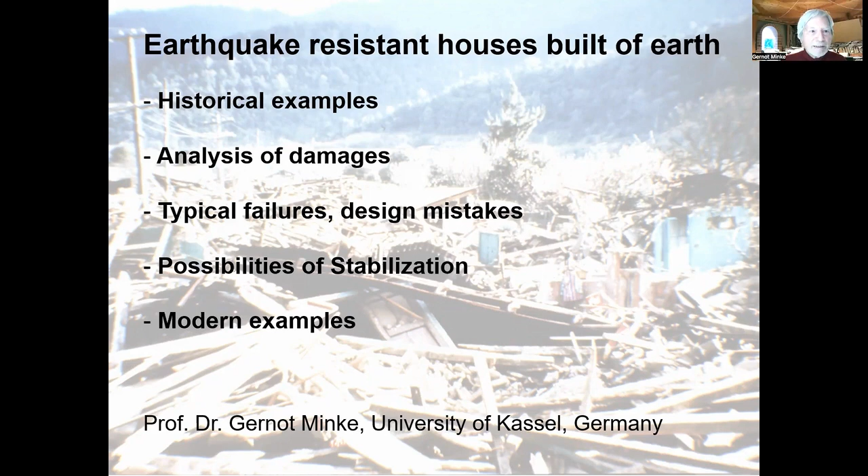We have two possibilities to build earthquake resistant, either with solid, thick walls like these structures they built 300 years ago in China, which withstood all the earthquakes, or flexible structures like this wattle and daub system, which I will explain later, which is flexible. It could move in the earthquake, but it did not collapse. It was from Guatemala during an earthquake.

Very important is the shape of the house itself. So we made some tests in our laboratory with a doctoral student. This is a heavy weight on a pendulum which shocks against this model of a house with a round ground plan, a round shape. And after 3 shocks, this model didn't show any cracks in the wall.

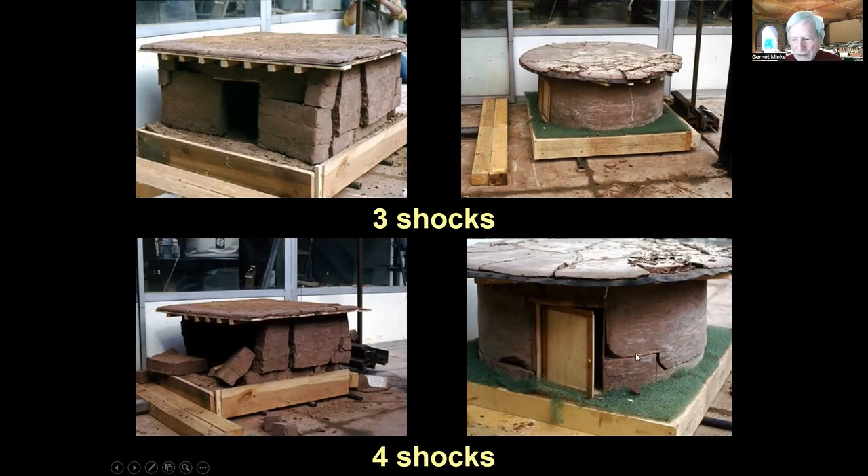But the other one, which was square, showed heavy cracks. And after 4 shocks, it fell down. But the round shape only had 1 short crack here, but it still withstood. Oh, sorry, this turned round. I don't know why. Let's go on. Okay, I can't move it.

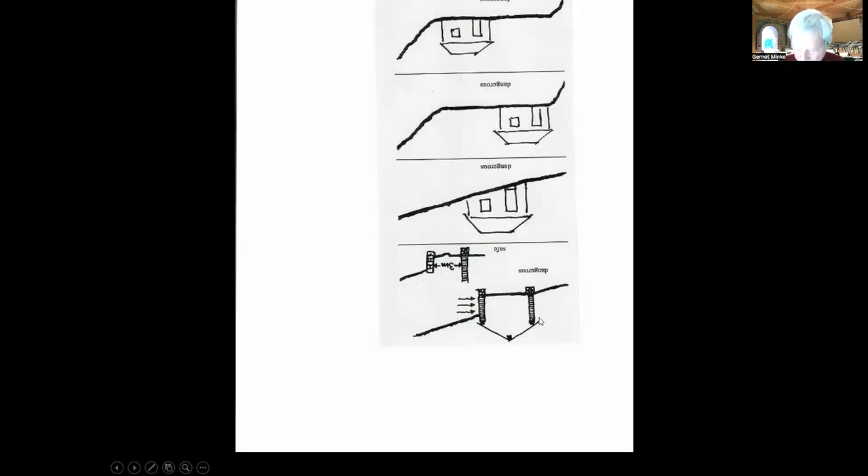The position on a hill is very important. Maybe you can see overhead. If it is on an inclined surface, it's very dangerous. So it should be flattened and it shouldn't be at the corner. Maybe in my publication you have seen this more clearly.

In a research project we did in Latin America, in the Andes, where we have a lot of heavy earthquakes every so often, we defined the errors which were made by single houses, 1-story houses. Always the same errors were made. First of all, there is no ring beam on the top of the wall, which keeps together the wall. Then the second one, the lintels are a problem. The lintels don't penetrate enough into the wall. 40 to 50 centimeters should be okay, but normally it's very little. So this will lead to failure.

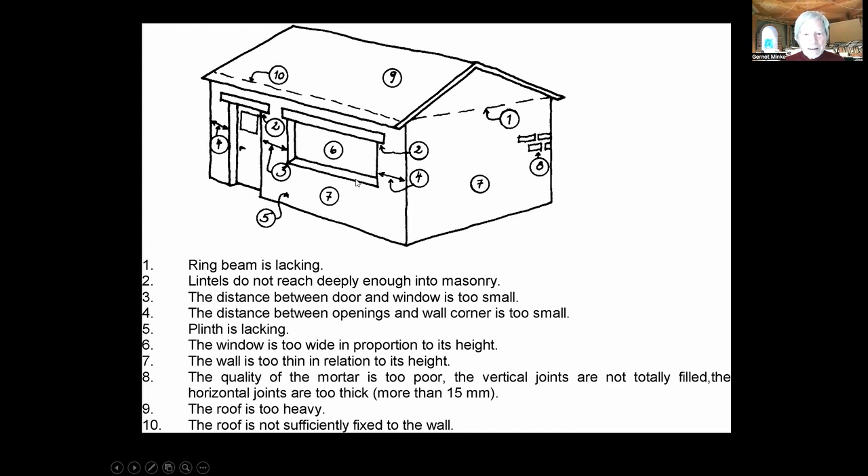Then the roof should be very light and not so heavy, and it should be well fixed to the ring beam, so that it is very well united. Okay.

And in the earthquake, the foundation is flexible, so it is called floating foundation. It will absorb the horizontal shock of the earthquake by deflection. This is a very new solution. Well, it's an old solution, but many engineers didn't know about that, and they have problems to accept it.

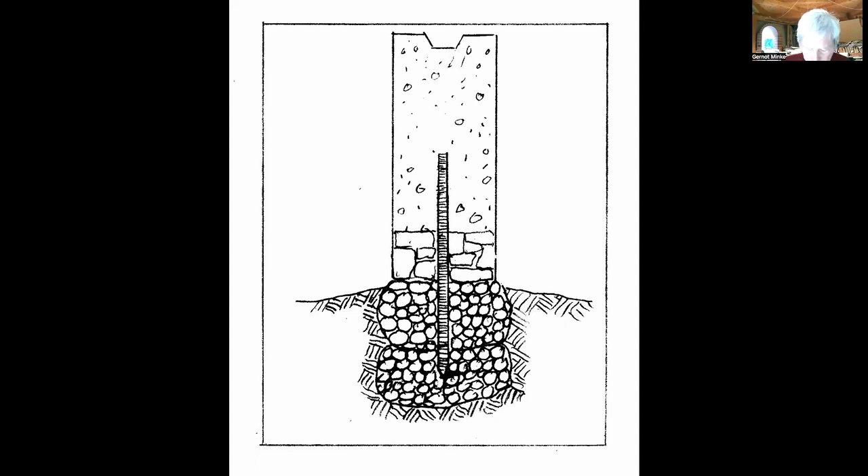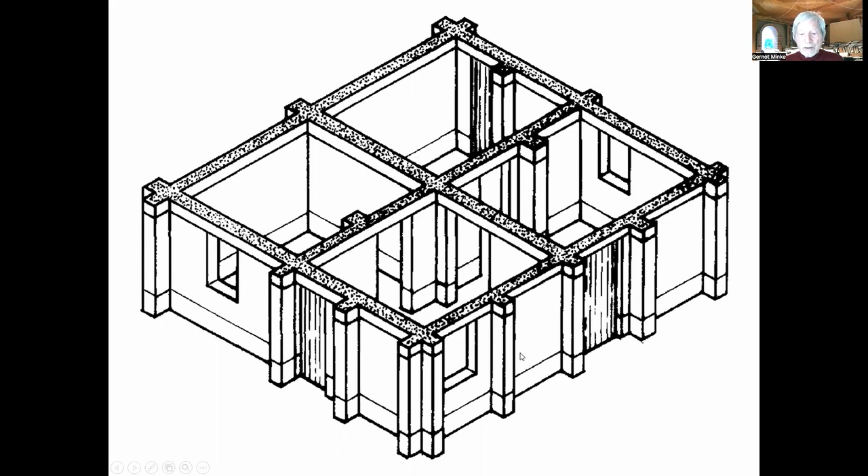One more thing is, here you see it's important to have a ring beam on top, which keeps together the wall elements. And if the wall is very long, we should make these fortifications, these pillars in between. So at least every 4 meters we should have one, or it's better every 2 to 3 meters, like you see here. So the wall cannot bend, cannot fall out. There are possibilities to shape the wall elements in an L or as a U, so that against horizontal shocks, they stabilize themselves by their shape.

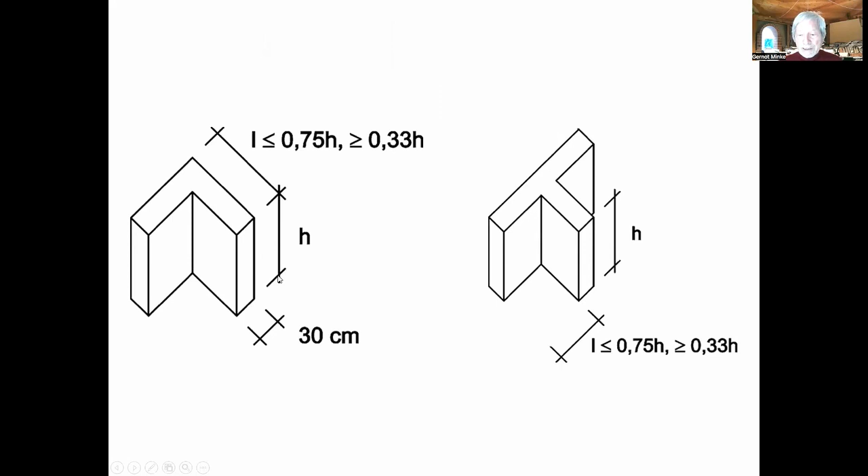We found out some proportions that have to be kept in mind. So for instance, the thickness and the height is very important. The thickness should not be less than 1/10 of the height, for instance. And here are some possible solutions with stabilized wall elements, by shaping them like an L or a U, or like a T. So these are different possibilities.

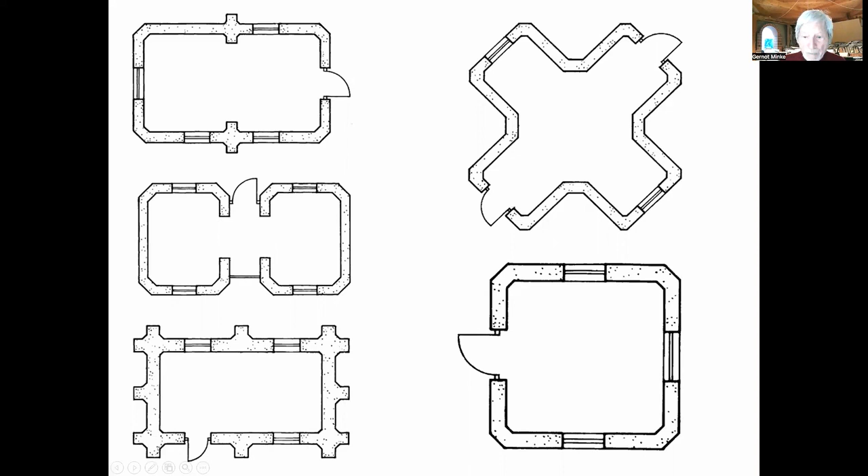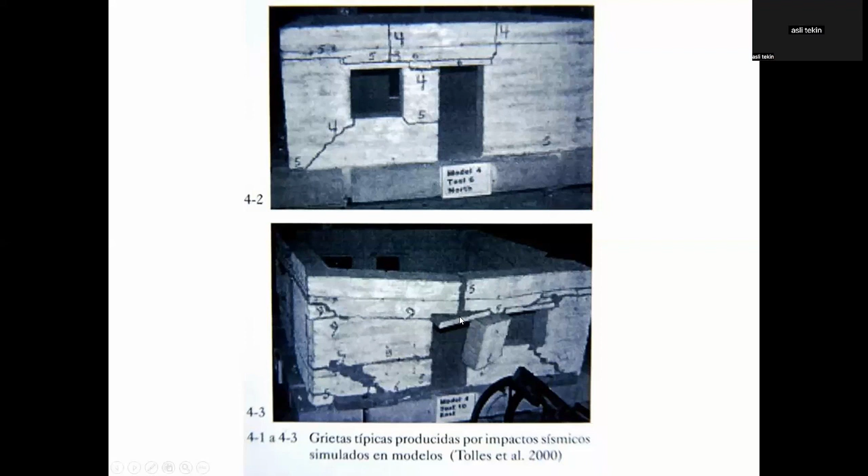So here we see a report of some earthquake tests which were made by other people. And you saw the lintels here. They fell down very soon, because where you have openings like the windows, you have always these cracks at the corner. So this was masonry work, bricks. And that's a problem if the lintel comes down. Here again, the lintels, here you see a very...

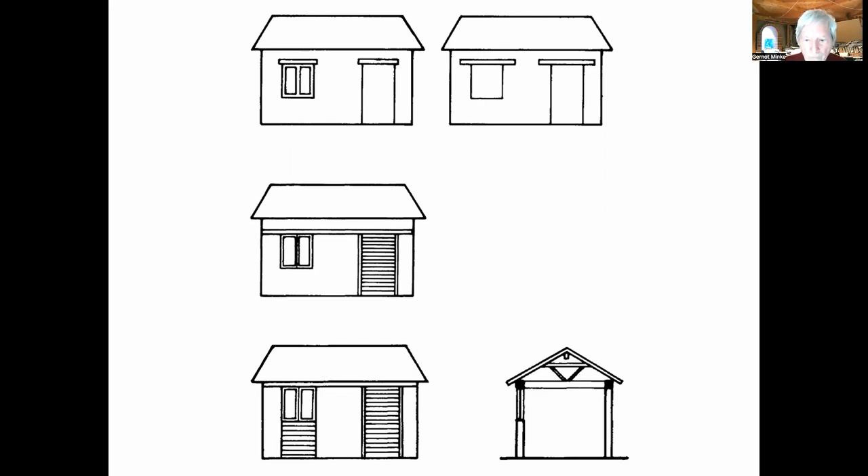The best solution is not making lintels like this here on the top, but to have a ring beam which at the same time works as lintel. So you have one solution for two functions; it is very much safer than these normal solutions. Sorry.

Yeah, the proportions of the openings are important. So the distance from the window to the corner should be at least 1 meter, never less than 1 meter. And the opening of the window never more than 120. These are just advices. Of course, these are not rules.

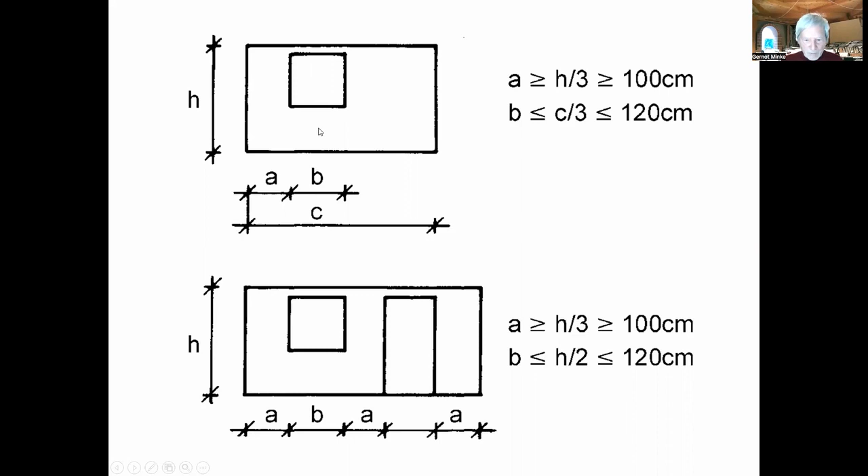We put all this in a manual, which was published several years ago in English, Spanish, and Farsi in Iran. But the publication you made in your institute now is more updated. But here you can see some more facts and examples. And you see my homepage. There you can see all my publications.

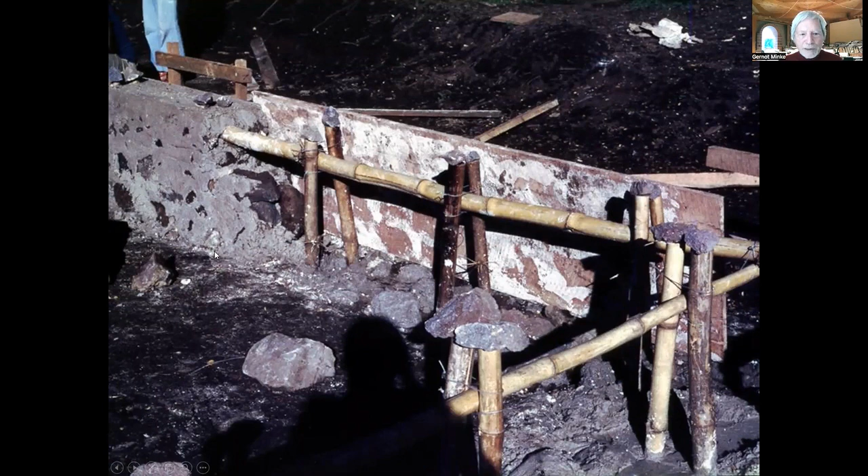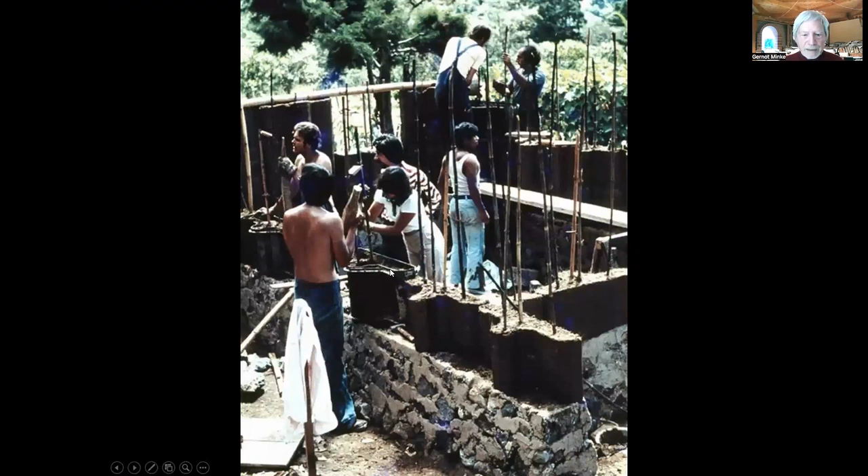So in Latin America, we built 5 different prototypes of earthquake-resistant housing. In '78, we built this house with rammed earth walls. The plinth was done by local stones and some lime mortar and bamboo reinforced. You see a horizontal bamboo ring beam and these 2 inclined vertical elements which stabilize the ring beam. And on top, we made elements from rammed earth. They have this special shape of a T.

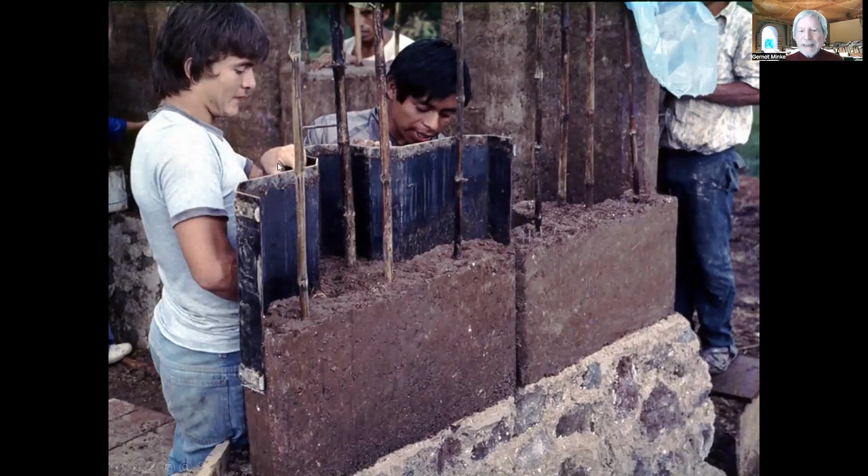So when you go up, we had a special formwork which you can lift up, and then you can ram it continuously in a vertical position. This is very important because most of the traditional techniques are horizontal, but this vertical is much better. Then you don't get horizontal shrinkage cracks. We have a shrinkage crack here, a vertical one, which is designed to be an opening when it cures, when it dries.

And we have 4 bamboo elements for vertical stabilization. So on top, you see a ring beam of bamboo in this case, because it was local material. And here you see the joints in the earthquake. It is meant that these joints can be open. It's a pre-designed opening joint because these elements, maybe I show it with my hands, can move this way, and even this way. So it's a flexible, a ductile structure, but with solid elements.

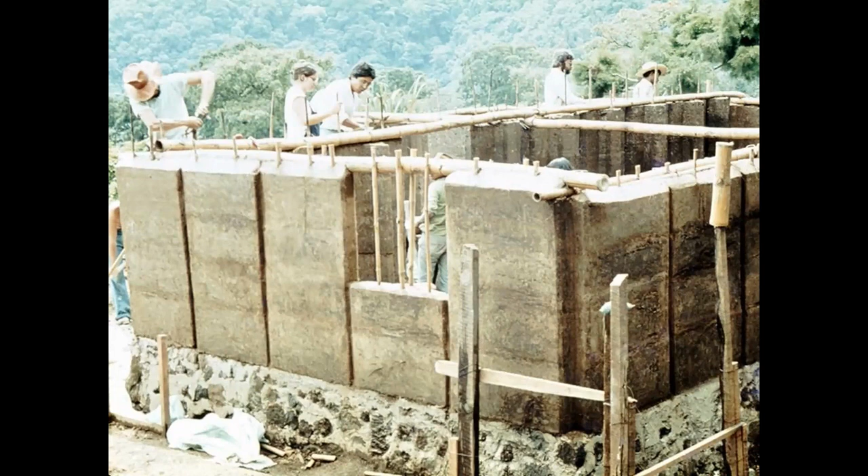So in the earthquake, only these joints open, but later you can fill them again with your thumb and with a little bit of earth. So it's no problem. And in fact, during this construction, we had an earthquake in Guatemala, and these elements really moved several centimeters, and nearby a church fell down, but this structure kept, there was no problem. This is a finished house.

Important was another new idea. We separated the roof structure from the wall structure, as you see here. You see the plinth with the horizontal bamboo ring beam here, the ring beam for the walls on top, and these 4 vertical bamboo reinforcements. Because we analyzed the mistakes which were done and the houses which collapsed in the earthquakes in Guatemala in 1976, I think it was. In one night, 20,000 people were killed by the roofs coming down because the walls normally fell outside and the roof comes down.

So in this case, we decided to separate the roof on a separated timber structure. This is a wooden post, 50 centimeters off the wall. So in the earthquake, the roof can shake with different amplitude than the wall. And they do it because they have different mass and different height. So they have different frequency.

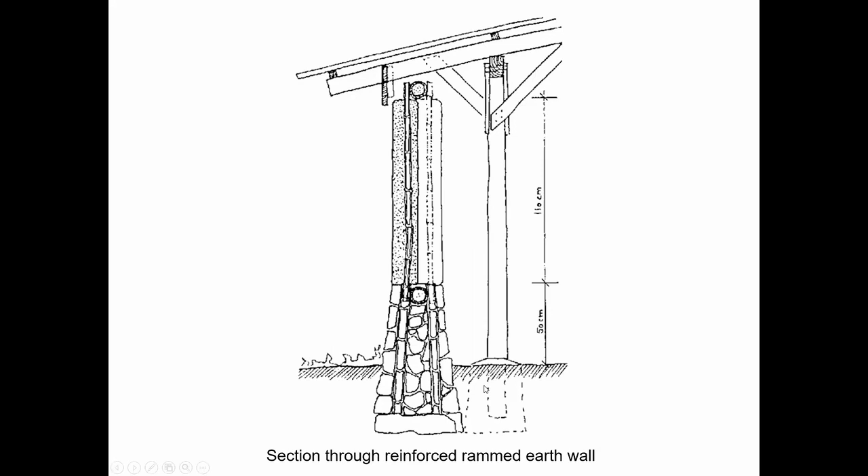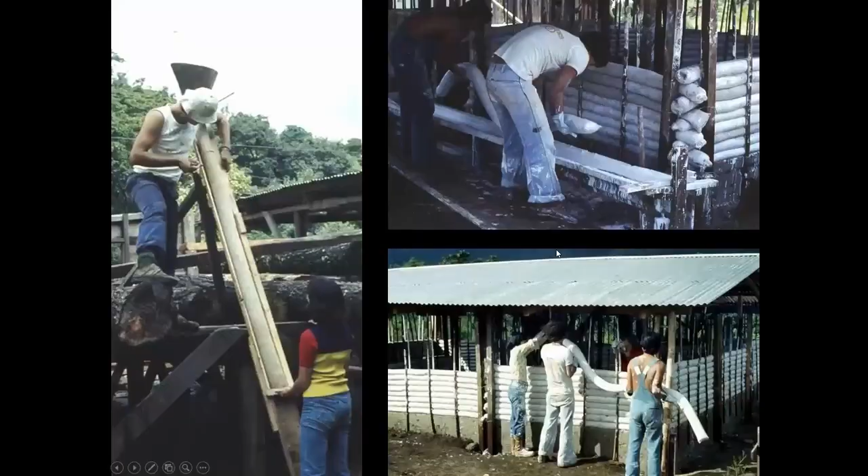We built another house at the same time in 78 from bags or hoses filled with volcanic earth, with pumice. This pumice is a light mineral aggregate, like Bims in German. I don't know your word. Pumice in English. We filled it in cotton hoses, normal cheap cotton weaving material. And then we put them in a mix of lime in order to save the cotton so that it does not rot. So it's again microorganisms. The lime is very strong against any microorganism.

And we put, as we see here, some bamboo rods on both sides with a galvanized steel. We fix this every 5 layers. And now we have a flexible ductile structure. You see here on the left, there is a post. So it's a timber frame structure with these flexible infill.

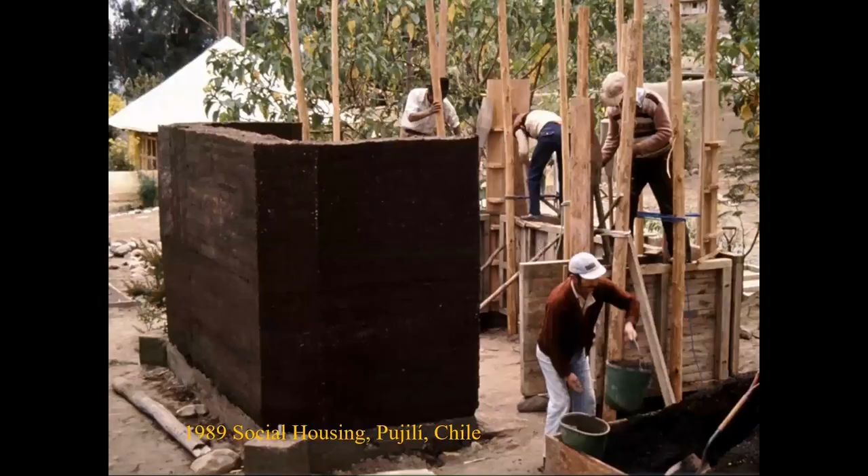Another rammed earth test house we built in Chile. And you see these elements have a shape of a U, and they are also stabilized with some vertical bamboo rods. And in this case, we also separated the roof structure from the wall. In this case, the posts of the roof were outside at the 4 corners.

And we built another test house in Chile in rammed earth. The elements have a shape of an L or a U, so they stabilize each other in the horizontal direction. The roof was positioned on posts outside, and the windows are from the bottom up to the ring beam, to the roof. So in the earthquake, these elements can shake a bit. The window may break, but the whole structure will stay. It is a flexible structure, a ductile structure from solid elements, the same idea, but a different solution.

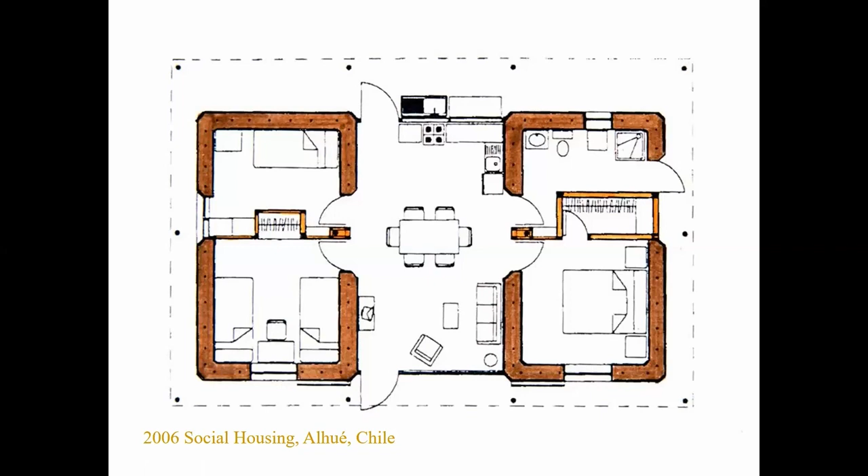Here we see these elements, rammed earth, and the bamboo reinforcement, vertical. And this was the test structure, the finished house.

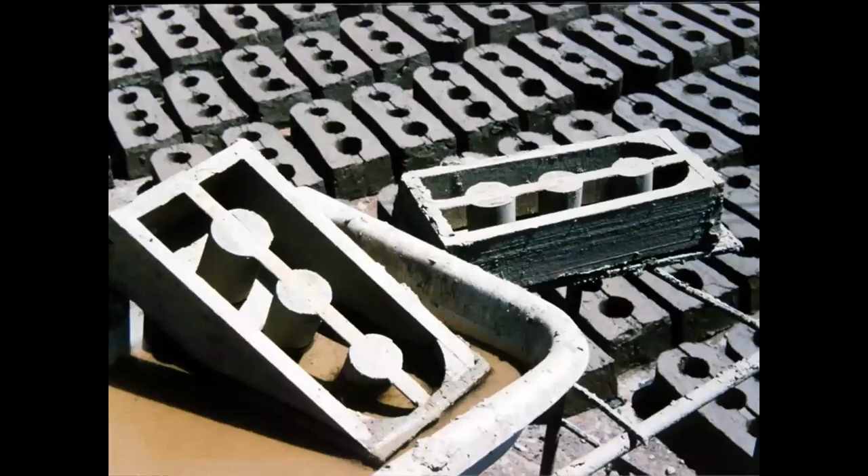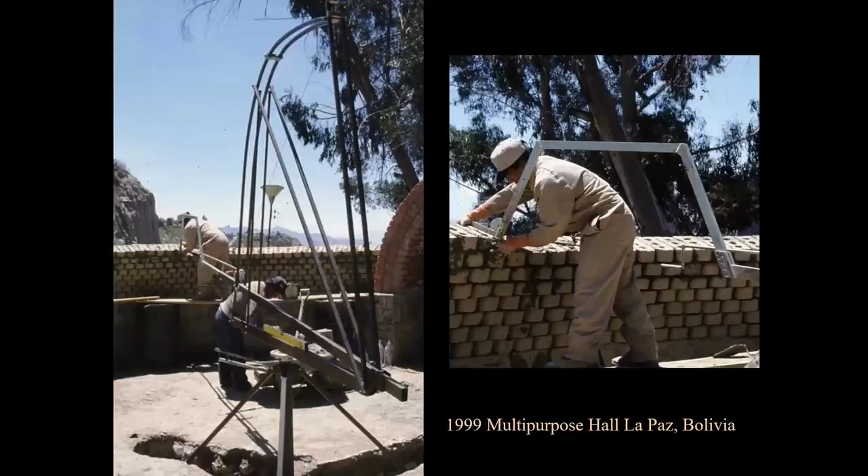In Bolivia, we built in La Paz a dome. I will show such a dome as a cultural hall for the municipality. And we made it from adobes, made by hand. You see these adobes, they were made in these formworks. The formworks are from wood. Adobe is a handmade, unfired earth block. They have 3 holes to make them lighter, to save material, and to increase the thermal insulation.

And we put them in circles by the help of a rotational guide. You see here this rotational guide which we developed. So if one layer is ready, it can be lifted up to the next layer, and so layer by layer, the dome is finished.

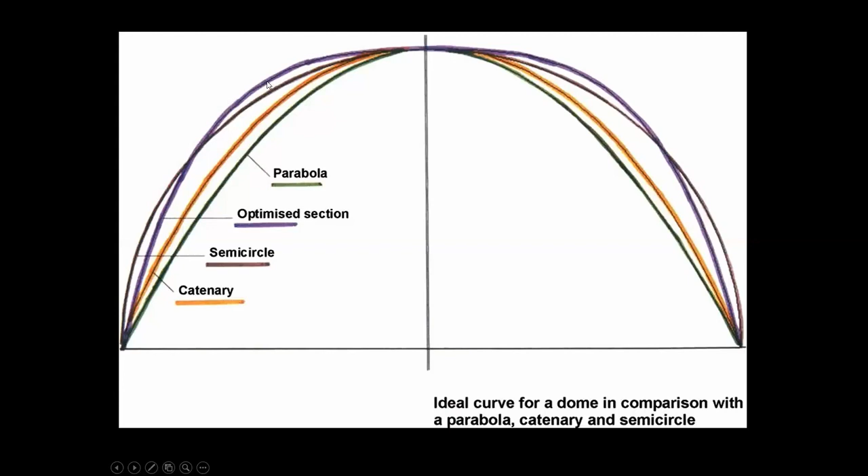And in the earthquake, this might collapse. So many churches with these semi-sphere domes collapse in Latin America, in the Andes. This optimized section guarantees that the forces coming down are exactly in the center, so you don't have any ring forces. And we could make an earthquake-resistant dome structure, and it was calculated by the engineers.

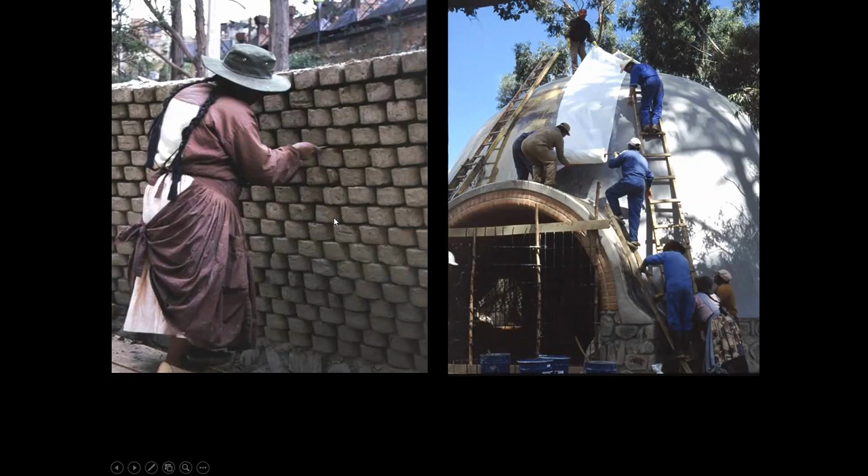And here you see one of the indigenous people. They are cutting off the joints a bit to optimize the acoustic behavior. And then it was covered by acrylic paint reinforced by a glass fiber fabric. It's the inauguration of the dome.

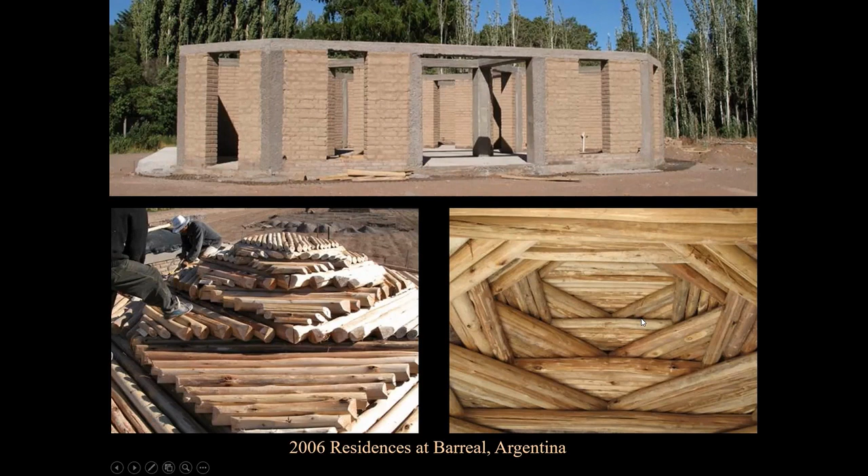In Argentina, we built a conventional concrete framework infilled with adobes. It was the first and only time when I built with concrete, because the clients wanted to have it and wanted to get the guarantee that it is absolutely earthquake resistant. But you need very good concrete and good steel reinforcement. For the roof, we used this Hogan type of local material, local wood.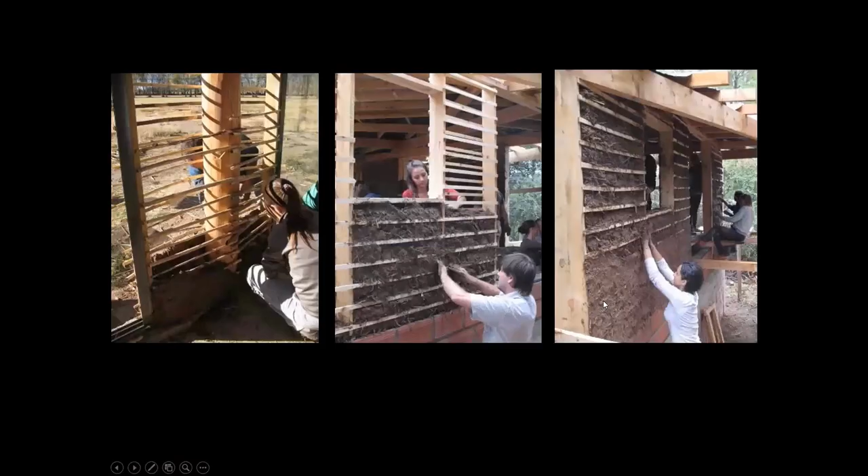Here another solution, but also wattle and daub. You see more exactly the horizontal elements and the infill with a mixture of straw and earth. So this is cheap. It is labor intensive, but if you have local labor... many owner-built homes are done in Latin America, South America, especially up to Mexico, with this technique, because you can do it without any skilled workers, with your friends and neighbors. The structure maybe you build with professionals, but the infill, all these elements, you can do on your own.

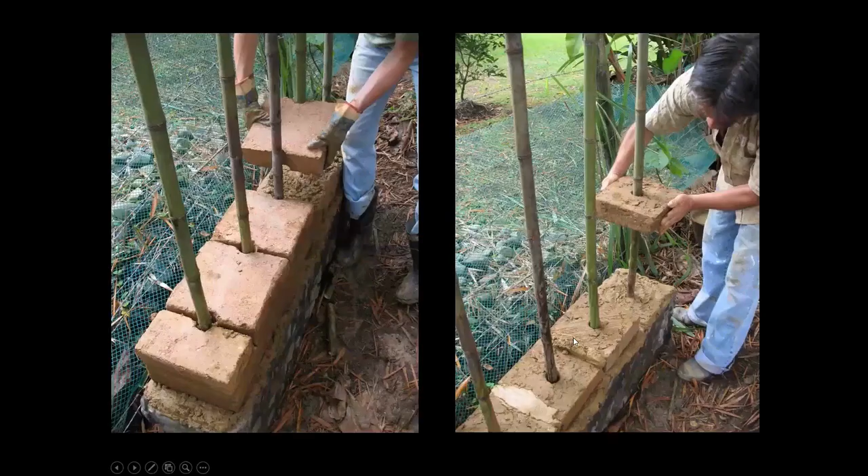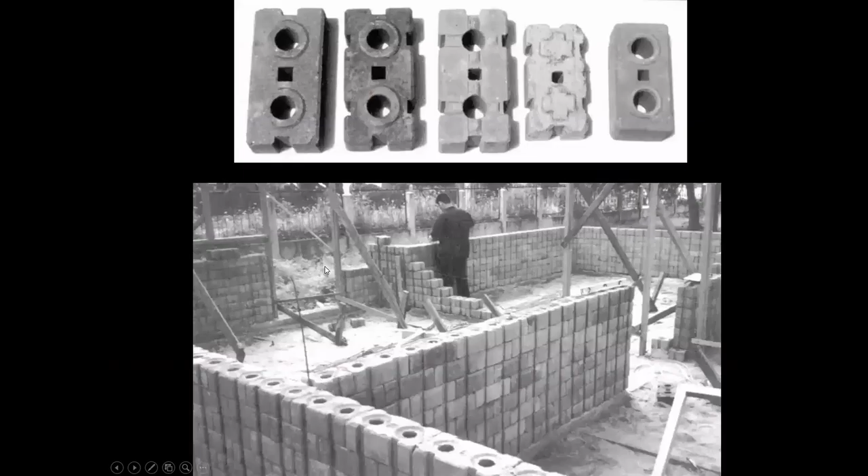We made a test of adobes with holes, so we could put bamboo sticks in as reinforcement. This is one layer. The next layer, of course, has these openings at the corner because we need this interlocking effect. Interlocking blocks are quite usual, often used in some countries in Asia. I think this is from Indonesia, but these are cement-stabilized compressed earth blocks. And you need vertical reinforcement. In this case, they used steel bars, and they filled the holes then with liquid concrete. So in my opinion, it's not the best solution because it uses a lot of steel and concrete, but just to show you possibilities which are used in the world.

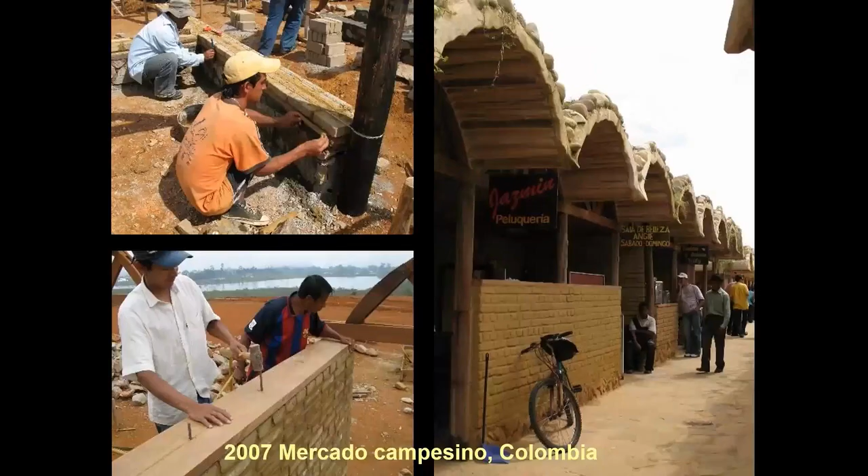In Colombia, we used a very simple system. These are round posts from local trees. And here we have an adobe wall. And you see every fourth layer, we put a barbed wire from one post to the other around. So we have now a horizontal reinforcement from barbed wire every fourth layer, which is a very simple solution, but it gives good earthquake resistance for the wall.

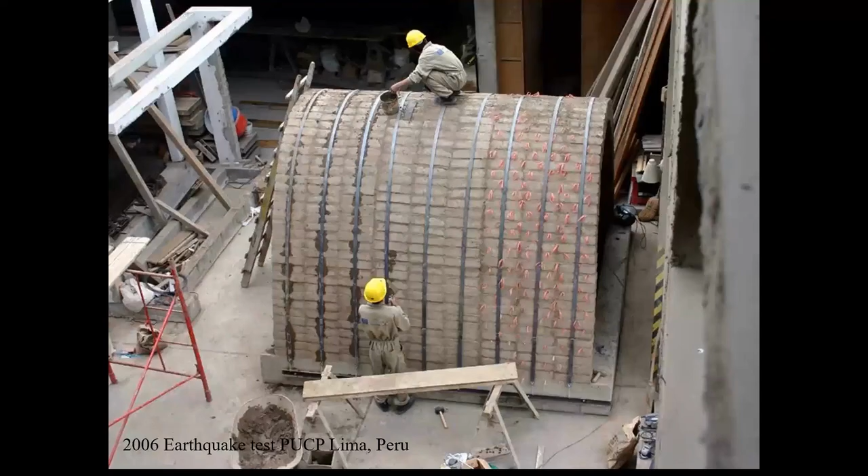In Peru, we did a test on a shaking table. It's 4 by 4 meters, to build an earthquake-resistant vault structure, which was pre-stressed by these metal strips, which were tensioned to the platform, and then it was tested by the simulation of the strongest earthquake which was measured in Lima. I have a video on that, and maybe I can show the test later.

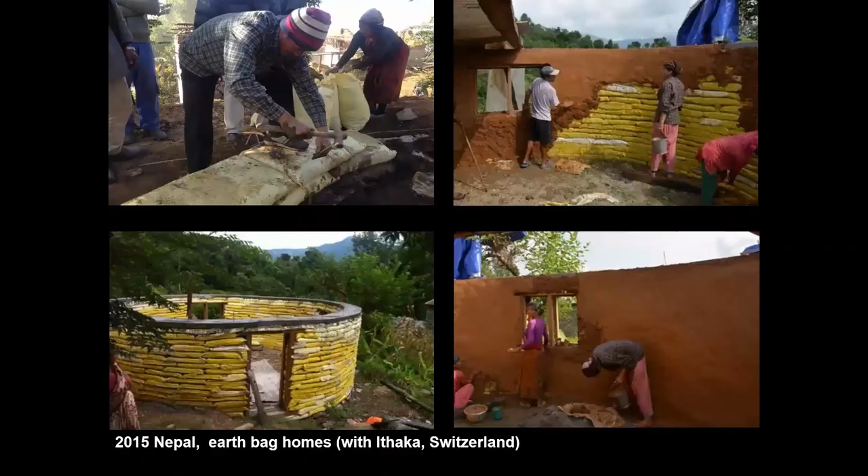In 2015 in Nepal, there was a very huge earthquake with thousands of people killed. And there we proposed, together with the Ithaka Institute from Switzerland, a simple technique to fill rice bags. These are bags from the market, normally filled with rice. We filled them with earth, with a clayey soil. And then we put some bamboo sticks for interconnection in between.

But on top, we made a ring beam from steel-reinforced concrete. This is necessary to get enough stabilization. And we have some vertical steel rods which go into the wall about 15 centimeters. The family itself, with some neighbors, worked on that, and they later plastered the walls with normal earth, with a very clayey soil, and you see the natural color.

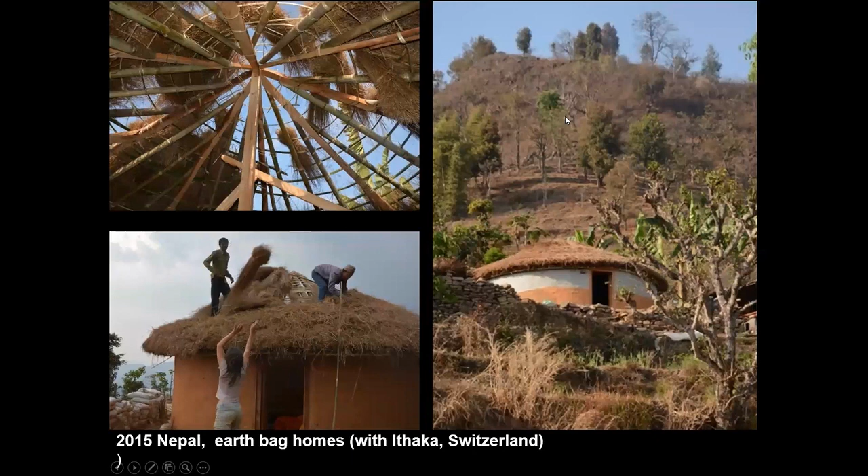And then with the wooden elements from the houses which broke down in the earthquake, they built a roof structure, and later it was covered with straw from the fields.

And our idea was that the family is building their own house, getting some friends to them. So about 12 to 15 people were on the building site, and always 2 from another neighborhood or another village, so that they can learn how to do it, and the idea is spread.

And we gathered some money, and we spent 800 euros material costs for one house. And we had to pay 100 euro in local money for the engineer who was supervising the structure. So 900 euros was the cost of one house for the material and the supervision. The labor, of course, was free because it was the family themselves who built it together with neighbors.

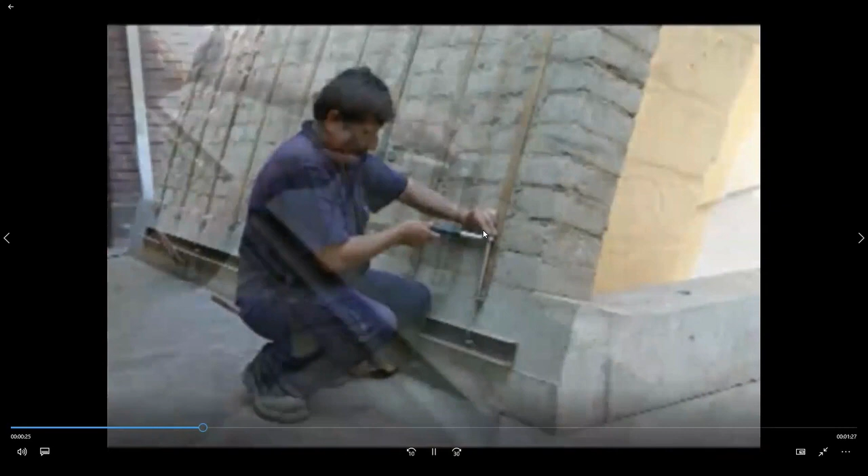Okay, now in English, sorry. This is the formwork of the vault. And we put these adobes on top. The adobes are very large. They're about 20 to 40 centimeters. And you see the metal strips for pre-tensioning here. Some 100 kilos were forced in these strips.

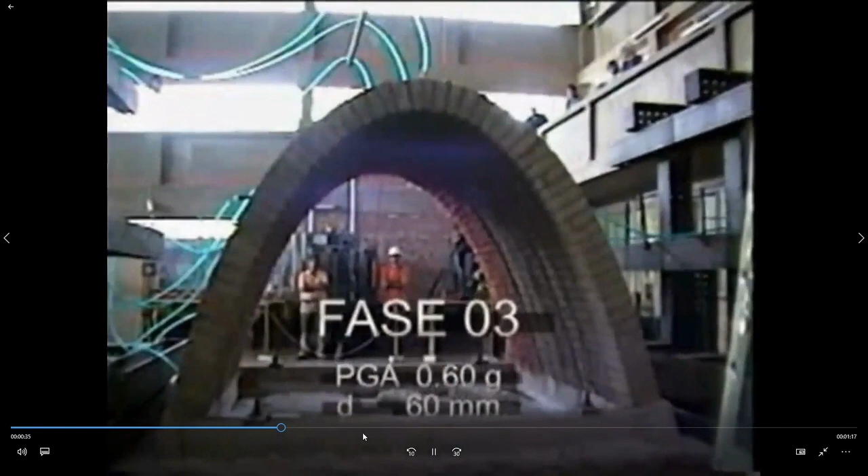And then we put it on the shaking table in different phases. This is phase 3, where the earthquake was simulated with different irregular shocks. And you see the shape is elastic, and it always comes back to the original position. Some mortar falls down because they didn't build an interlocking system. It was wrong. Normally you have an interlocking system and then you don't have these problems, but they built it arch by arch, very simple, and I was not there when they were building it.

So in the phase 4, we have 80 millimeters of horizontal deflection. You see, the mortar comes out, but this is due to the wrong building without interlocking adobes. But you see, the structure itself, it keeps. It comes back. So it is a ductile structure where the kinetic energy of the earthquake is absorbed by deflection. That's the idea.

I think I can say the questions. Burcu Kunder has a question for the earthquake test of the vault. Is there support or connection underneath the arc? In the test video, we couldn't see, as I understand. She's asking if there is a connection underneath the arc.

Well, this was a formwork which was taken out later. I don't know what connection you mean. Oh, at the bottom, there was a concrete plate. Is it only the strips over the arc? No, the strips were fixed to the foundation. Okay. But they only go over the arc, is that correct? Yes. They do not go under the arc. No, only over. Oh, I see. So it's a pre-stressing of the whole structure. Mhm.

Okay, I had a question, because of my ignorance, perhaps. This earthquake test in the laboratory, yes, is there, how to say, how many degrees of earthquake it is corresponding to? Oh, this I don't know. The deflection was 80 millimeters. And the G was, I think, 0.8. Okay. Mhm.

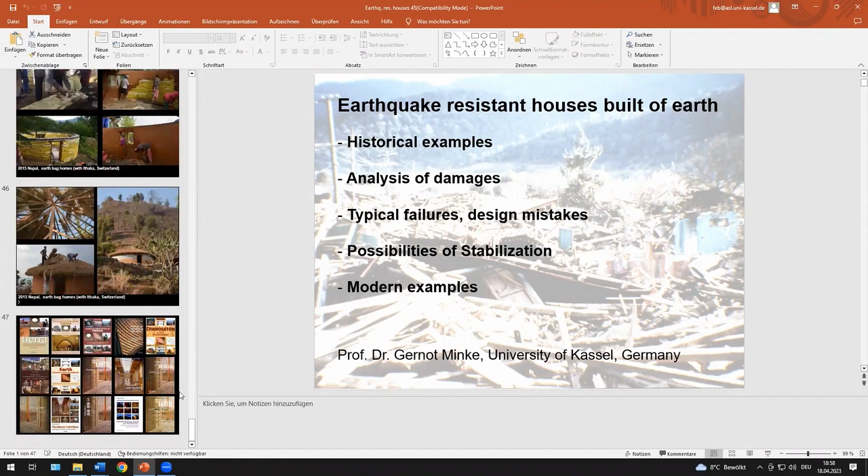Okay, good. There are more questions, by the way. Yeah, then more questions, okay.

About the roof system, if the roof is too light, especially in regions where there is too much wind, will it be a problem? Yeah, of course, but for the earthquake, it should be light. So it depends which is worse. The roof has to be fixed to the ring beam. And if it is fixed well to the ring beam and the ring beam is fixed well to the walls, I think there's no problem, even if it's light.

Okay. And about the shape of the roof, if the house is, for example, L or rectangular shape, should the roof be in the same shape? Should a rectangular plan house have a rectangular roof or a vault roof, for example? What do you suggest?

No, it could be any roof. A vault roof, you have to think about the forces, the inclined forces which come down to the foundation. Okay, until the foundation. Which material do you prefer for the outside of the roof, to cover the roof? Well, it depends on the local availability. Mostly waterproof materials.